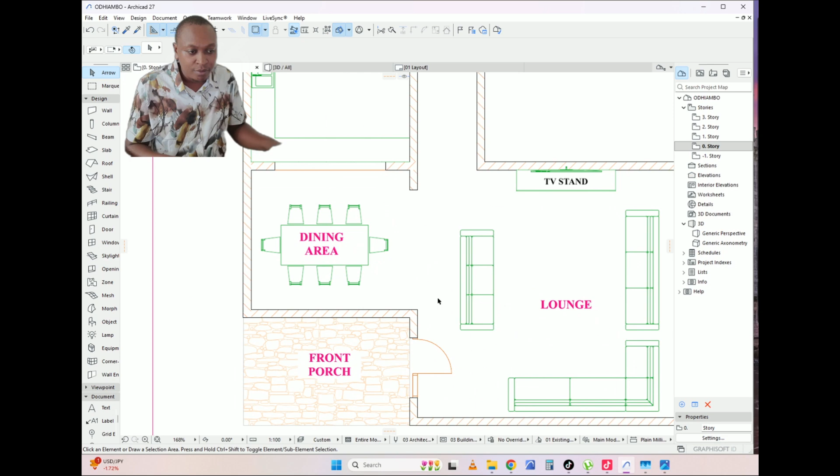So ukiingia hivi unapata lounge yako mzuri hapo, very spacious. TV stand yako iko hapo, dining iko hapa hivi, kitchen iko hapa.

Okay, now when it comes to the kitchen, kuna kitu tunaitanga the work triangle. Sawa, the relationship between your wash area, that is your cleaning area, ambao ni sink, with relation to penye unapikia na pia penye hii fridge iko.

So I want us to place these elements in a way that now maneno ya workability, hii kitchen itakuwa seamless.

So kuja hapa, so this is my cooking area. Hii naweza ipigisha corner. No, I'll need first of all, yes, I'll need this corner.

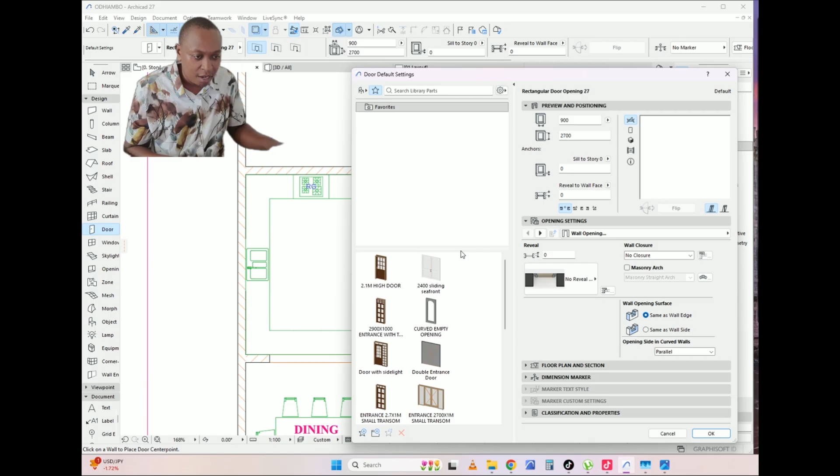So now I can introduce the door to my kitchen. Door nitakuja nichukue hii nilete hapa hivi. Hiyo ndio mlango ya kitchen yangu, okay? That is the door to my kitchen.

So nikiingia hivi napata some worktop. I can introduce some two stools hapa. Some two stools here. Where are some chairs?

Yeah. Which one is your favorite one? Style 1, 2, 3, 4. You can use any. Let me use these 3.

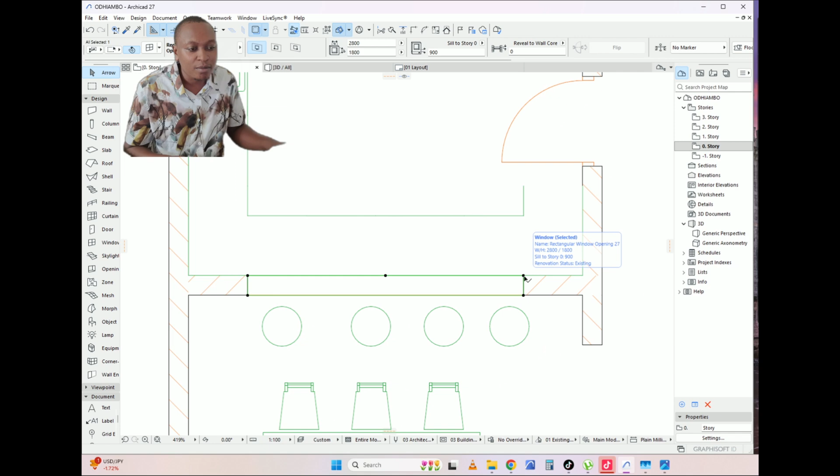So huku ni tu vitu wenyewe tunakonga kwa dining. Okay? Tunyo mnasema tunaitanga sijui breakfast place kitu kama hiyo. So I think my kitchen now is almost complete. Hii dining yangu iko chonjo hapo.

Do you need to make this bigger? Yeah, just a bit bigger. Just a bit bigger. 400. Yeah. 200. Yes.

Now my dining area. Top. This is the sink, these are the cooking area, and this is the fridge. So what I'm calling the kitchen triangle is this, okay, the relationship between these 3 elements. This is what makes your kitchen very, very practical.

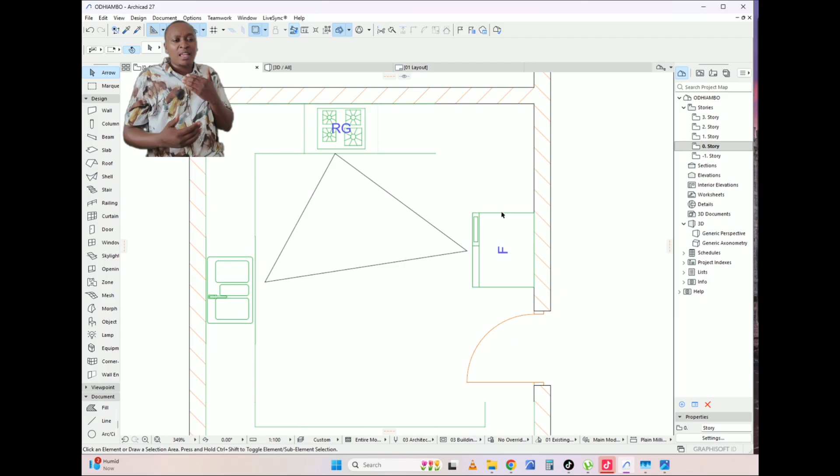Otherwise, sijui kama ushaenda pahali unapata the cooking space is too far from the washing area, na unapata pia inakuwa too far from the fridge. So hii work triangle ama kitchen triangle inakuwa very, very important.

Okay, so I need a pantry here. Pantry, size ya pantry inafaa ikuwe aje? Acha kwanza niweke mlango alafu tuchambue.

Hii pantry, size ya pantry inafaa ikuwe namna gani? Very many people get confused. We'll also need a back door. Mkumbuke hiyo, nisisahau.

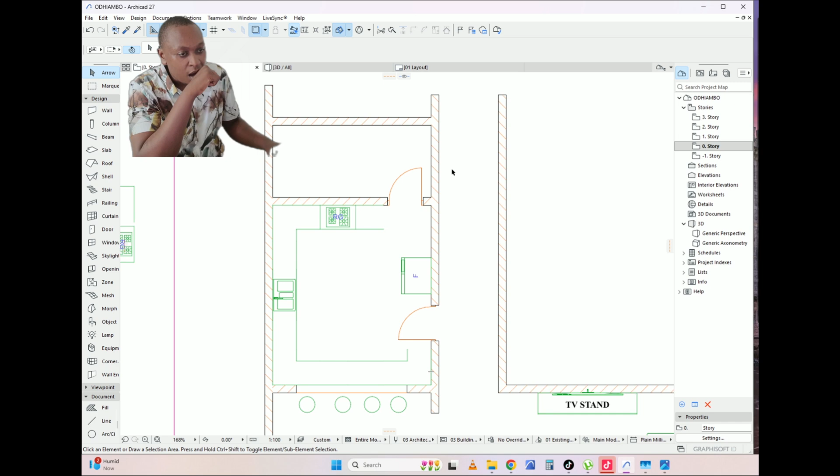Pantry, size ya pantry inafaa ikuwe aje? Pantry inafaa ikuwe design yenyewe unaweza weka what we call a cabinet ama a storage space yenye iko na depth ya 2 feet.

Okay, so hapa naweza kadirisha yangu na niweke my storage hapa. Hii ndio kitu naita storage.

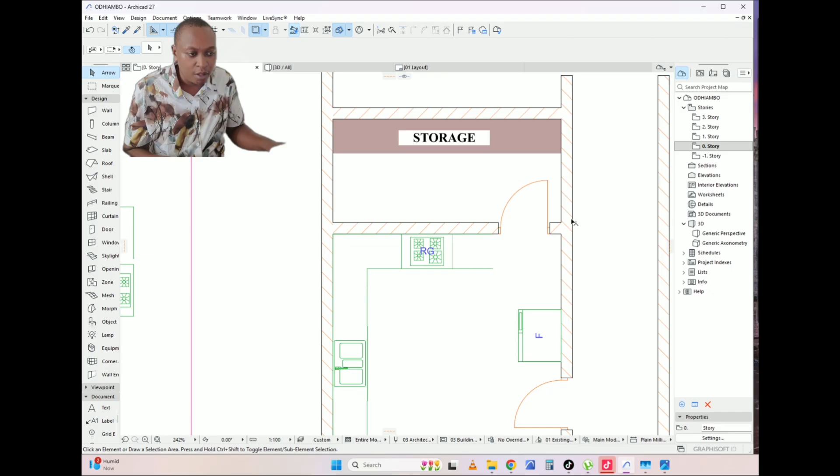Okay, but I want to introduce a back door at this position. So how do I go about it? I don't want a back door into the pantry. No. What I want, this being my kitchen.

Sijui kwa nini mwenye alikama na hii jina kitchen aliyekatia hapa. Ama inafaa kwa kitchen. I don't know. But

To make sure that I don't introduce so much circulation area into this kitchen, nataka nilete back door yangu hapa. This will be my back door.

Na hata inaweza funguka na nje, to make sure that now tutatumia space yetu ya ndani sana, so hii inaweza kuwa back door yetu.

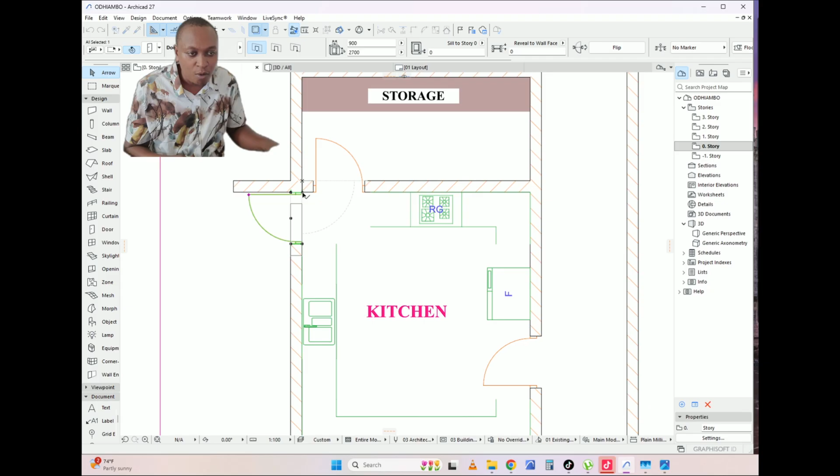Maybe hii sink sasa isonge tu kidogo. How big is this? This is 600. Songe tu kidogo, alafu nipatie dola kama 2 hivi hapo. And then I'll come now balance my

things are nini. Yeah. So this being my kitchen, so my triangle still remains, as you can see. So this is my kitchen.

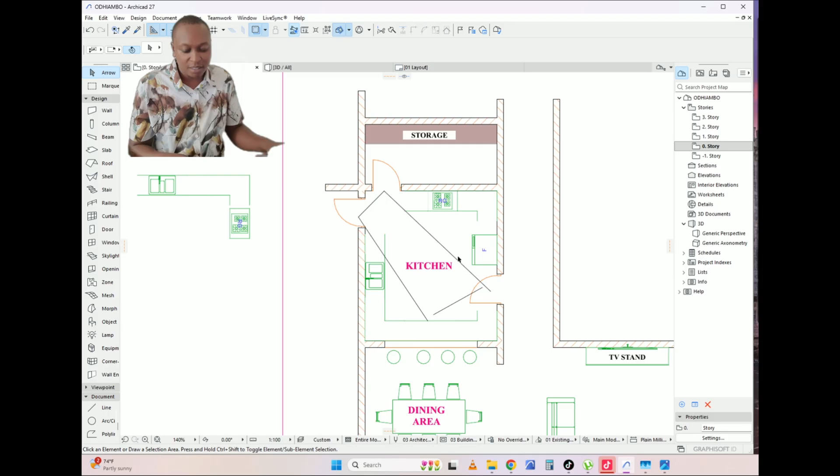So nikiwa kitchen yangu, I have my fridge here close to my cooking space. Sijui kama unaona, so the only circulation space nimeintroduce ni katikati. Na unaona inafanya nini? Ina match. Sawa? Sijui kumatch ama ni kufanya, lakini iko tu sawa.

Just a recap kwa wageni wenye wametujoin sahi. Ukiingia hapa, unakuja lounge, unaingia dining. There is a breakfast place here where we have like 4 to 6. Unaingia kitchen yako. Okay? Ukiingia kitchen, unapata fridge hapo, cooking space na nini hapo.

Then hapa kuna pantry, this is what we call a kitchen store. Pantry. Ndio tunataka pantry. So I'm done with my kitchen, and now I'm supposed to look for my common washroom. Hiyo ndio kitu next nataka tufikirie kuihusu.

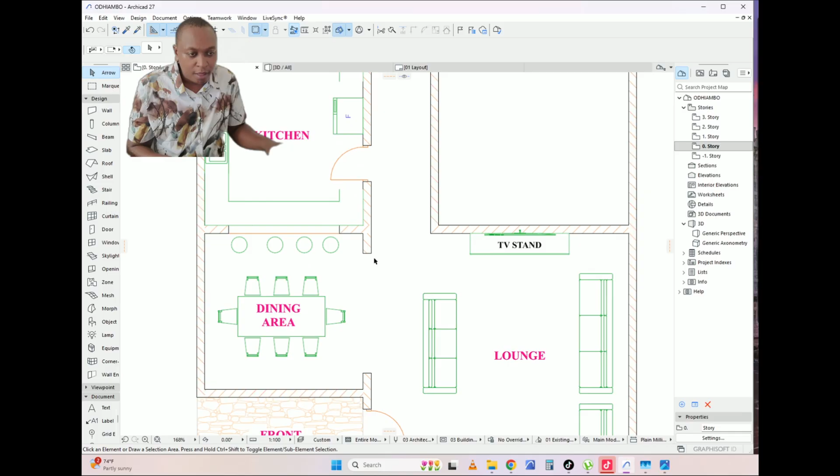Maybe tunaweza funga hii kidogo 2500. Maybe tuifungue hii side. So ukiwa lounge huwezi ona kenye inaendelea kitchen. So after that now I'll come regulate.

I'll come fix now my back porch at this point. Back porch yangu inafaa ikuwe how big? Hii ni swali moja. Back porch yangu inafaa ikuwe at least 1500, that is 1.5 meters wide.

Okay, so now nataka at this point now I'm able to determine the size of my front yard. Size ya front yard yangu inafaa ikuwe at least 7 meters. Sawa? Na juu shamba yetu ni kubwa na huku hivi nyuma, mimi nataka niweke kama 10 meters. Sawa? Kutoka hapa kuja hapa ikuwe 10 meters.

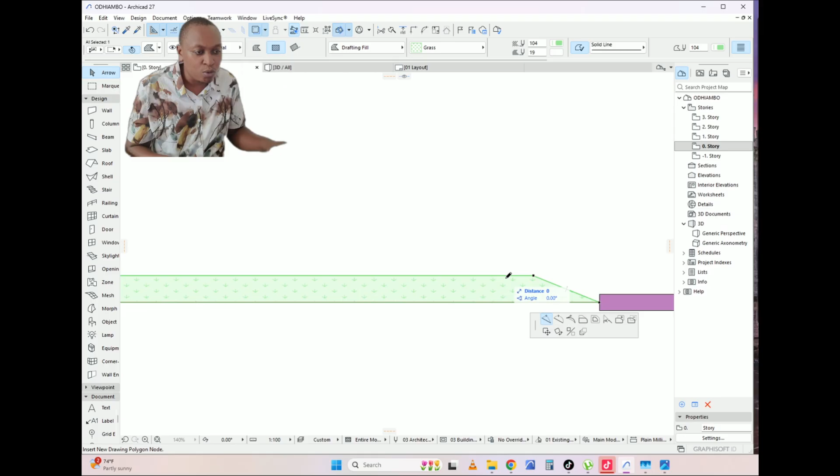Now for this green area, I want to make sure my dimensions are right. At least the green area should be about 1 meter. Then I can make this a bit curved, curved further out. If it's too far, let me bring it closer, because I want it at 1 meter. And that is my green area.

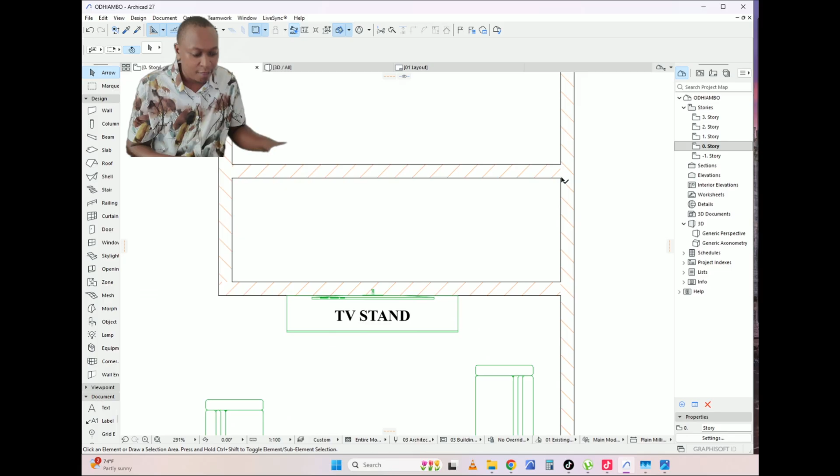So I'll bring my house towards this side by 2 meters. So it will be 2 meters. Now I'm left with 1.5 meters. I'm thinking I'll put my washroom here. This should be 1.5 meters.

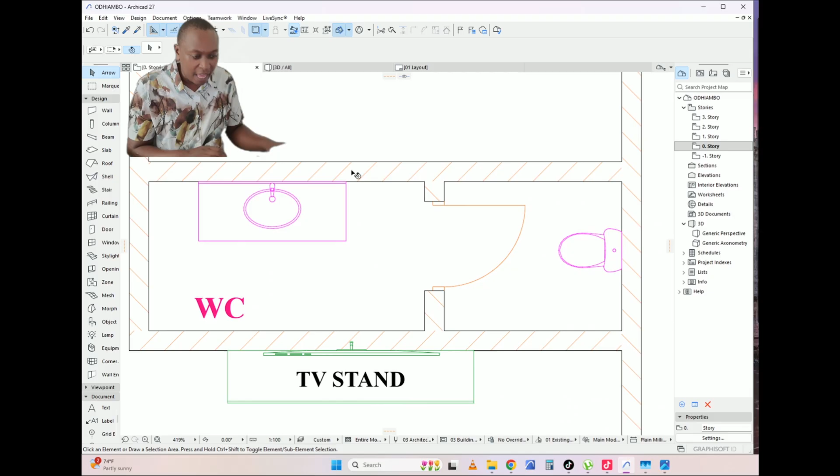So let me check the walkway—is it enough? That's 0.9 meters. Maybe what I can do is widen this a little bit, because I want this thing to be inbuilt.

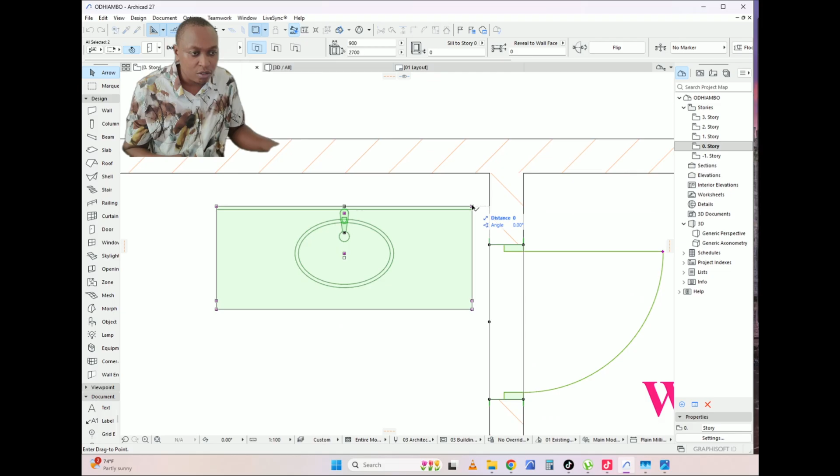Empty opening—where are you? An empty opening that is 2.7 meters tall, 900 wide. And then now I interchange the positions of my toilet door, bring it like this, so this becomes my common toilet.

So this sink, how big is it? It's 2 feet by 1.5. That leaves me some storage space here. Here we can have a cabinet that can be used to store things like tissue and some detergents. So this is storage.

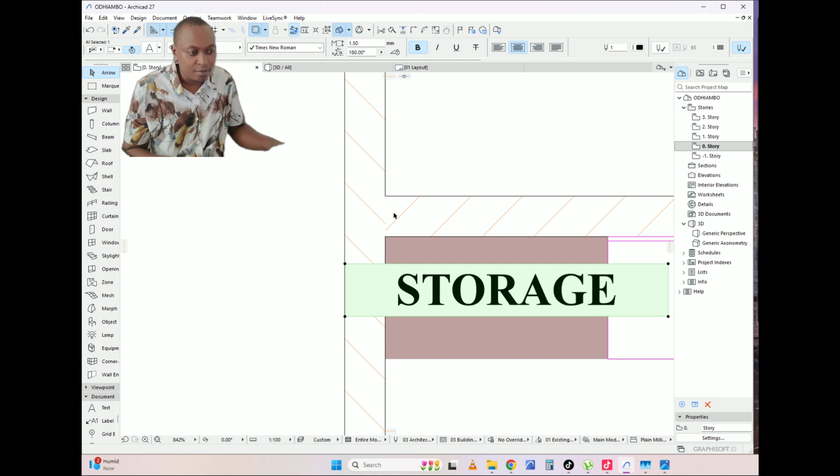I can make this a bit smaller, to 1200, and then now it matches the size. That's some storage, and that way now I have privacy—I'm not directly facing the door for this. Okay, and yeah, that's it now.

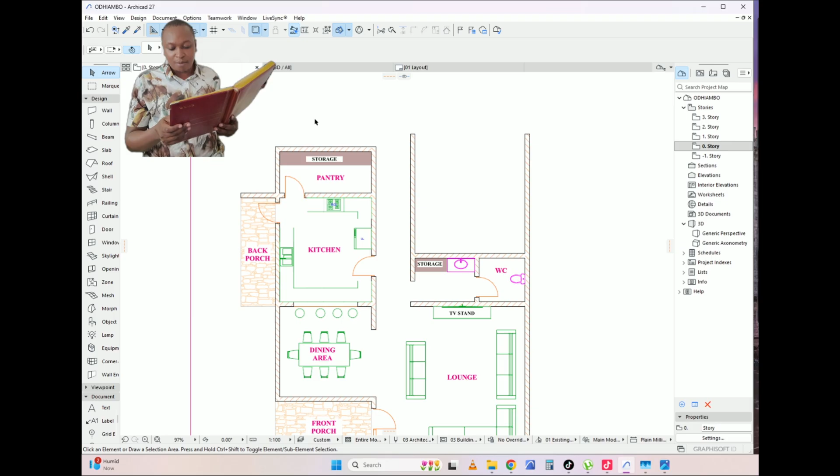We're actually missing the staircase now, staircase, guest bedroom—staircase and guest bedroom, those are things I now see we don't have, plus the laundry.

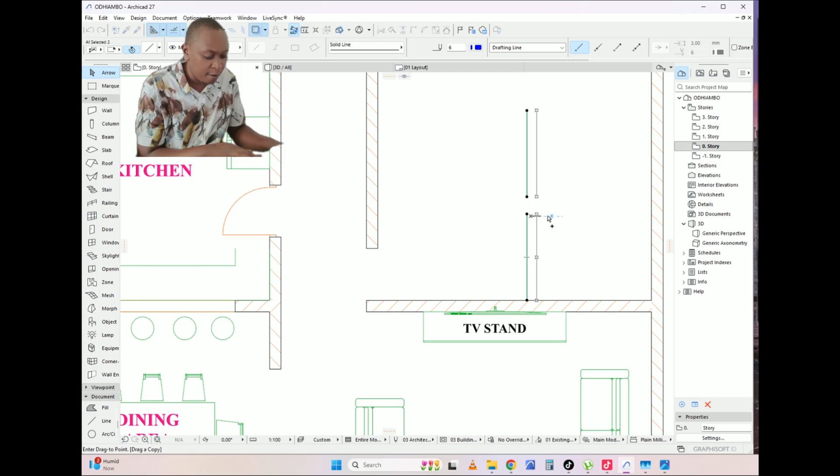My staircase is 1.5 meters wide. I've been on site for some time showing people staircase sizes, showing how you make small staircases—at times they end up too small. Those treads and risers and these lines I'm now drawing here, all this information—before you start building, you have to have the right information and the right illustration to make sure that the moment you give your builder the job of building, the builder will do the work properly.

So, 1 2 3 4 5 6 7, this should be 10, so 7 8 9 10. This 1 2 3 4 5 6 7 8 9 10. The 11th one now becomes the landing. So what is 10? I'm talking about 10 risers and 10 treads. Okay, this should be 1500.

That should be 1500, that is the size of the landing. So now it's time to finish up.

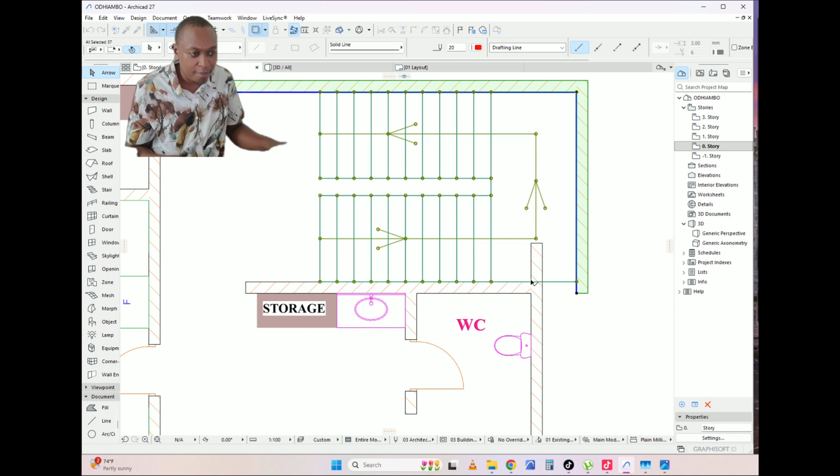What do you think? The staircase should come after the washroom. Staircase comes here, staircase comes here. Okay?

But now it's become too big - this is just the first idea. Let's see how it works out, let's put our washroom back where it was, like that. Okay, so we get this back, and instead of having a door here we make it an empty opening - 2700, let's make this an empty opening like that.

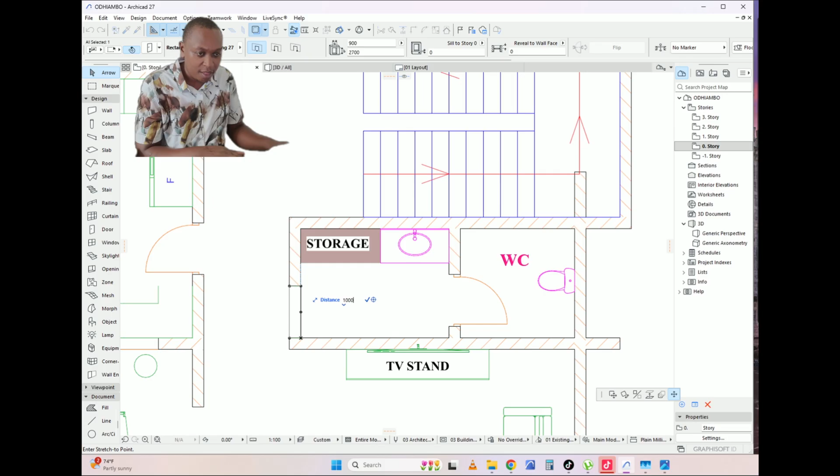1000 like that - sink and storage there. And then now we have the staircase at this position. How do you see it? Let's put the staircase here. Now as this comes in, where do we put the master bedroom or the guest bedroom?

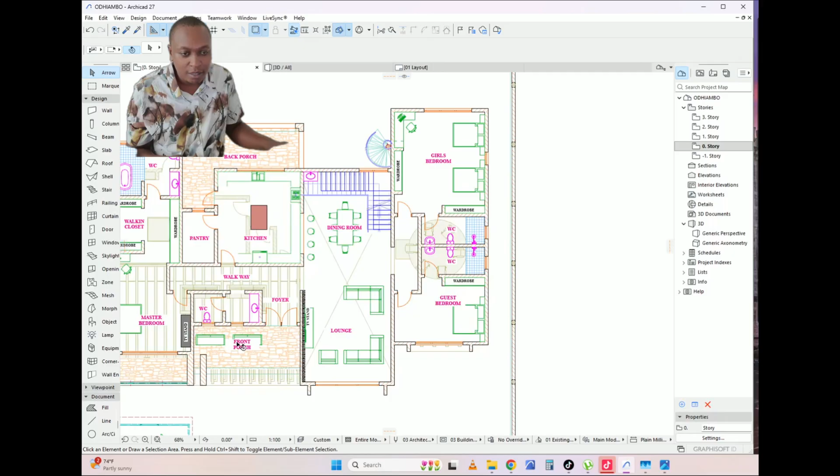So if it's a room, I've come and taken that study table and this. Okay? So for this bedroom, I want the washroom to be at this point, but I don't want to put this door there because I'm thinking, isn't it too direct?

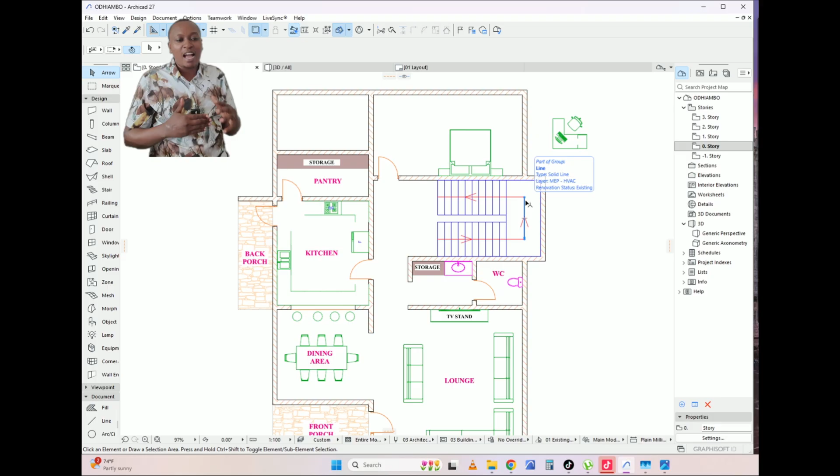So what can we do about it? Because from the look of things, this would be the best position for this though. It can happen that someone out there wants to build, is stranded, doesn't know who to start with, doesn't know who to call.

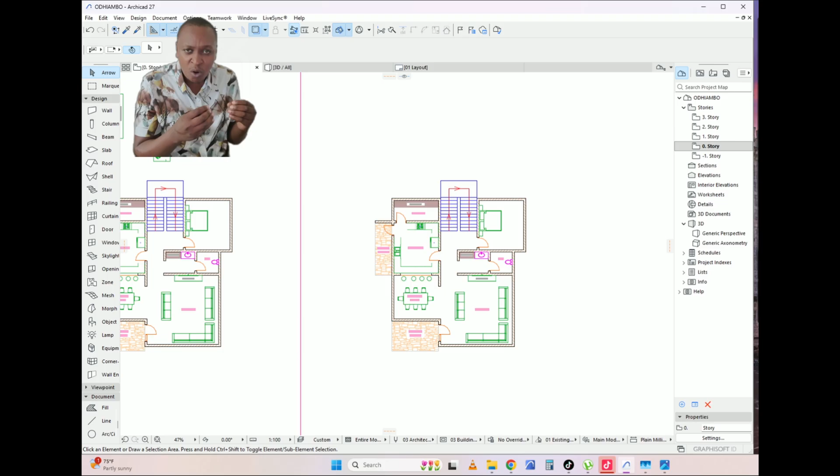These are the basic informations. Kama nantahitaji hizi ni zile basic ujanjas, maujanja ndogo ndogo wewe kama client unafaa kuwa nazo basically.

Na the reason why niliwaambia mi ni educate sana ni kwa sababu I need clients who are educated, because dealing with an educated client is way easier compared to kudeal na mtu mwenye hata hajui plan ni nini, hajui hata anataka nini. So that's why nawaambia ngoja kwanza ni-follow.

Kama uko hapa, niweke shower, na niweke bafu hapo. Niweke choo na niweke bafu hapo, lakini sasa hiyo bafu nitaiweka hiyo side. Maybe I can use some different color and some different marking.

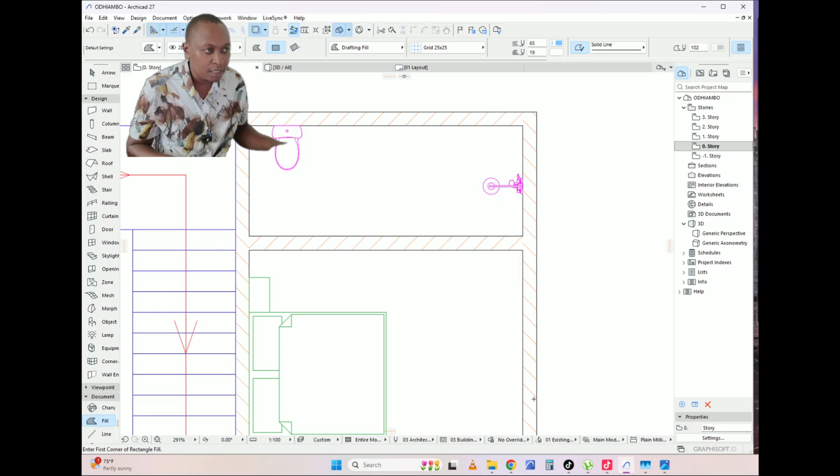Hii bafu yangu iko hivi, iko 1200. Hii ni choo, sawa? Na bafu yangu iko wapi? This is my shower cabin.

And then at the center, what do I place? Okay, sijui kama mnaelewa hiyo njaro. Wacha niwaeleweshe vizuri. Wengine wanauliza sasa, milango ziko wapi za kuingia kwa shower, sijui ziko wapi.

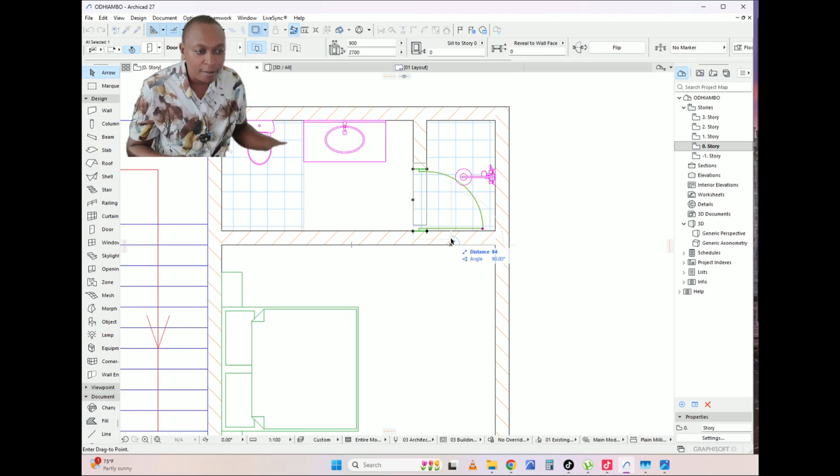Naweza amua ni kwenda sliding ama hizi milango tu za kawaida. Okay, zamani kuna sliding ama hizi milango za kawaida.

So nikitumia milango za kawaida, I'll have to make this a bit bigger and practical. Na practicality hapa ndio inakujia. Hii maneno ya ukifungua mlango, sijui inaanza kuongana na shower ama inaanza kuongana na choo.

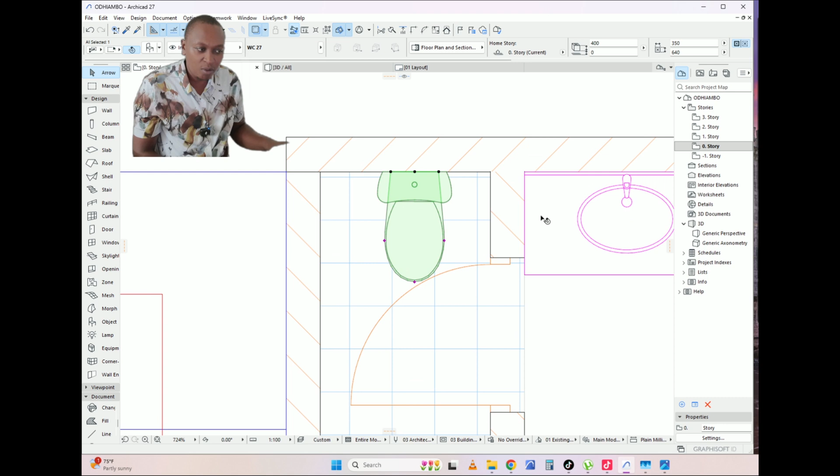Acha nitumie hii choo kama example mzuri. Nikifungua mlango yangu ya choo, sifai ati ikue sasa hata hiyo mlango siwezi ifungua yote kabisa. No, that is very wrong. Okay, so I need space.

Okay, if at all nitatumia kind of hizi milango, nitahitaji space for the toilet side, ndio choo yangu nisikuje nikagonga choo na hii mlango. Unaona, unafungua vizuri, unafanya shughuli yako hapo, unamalizia.

Okay, also hii sink sioni zina crash, so I need more space. The only disadvantage of this kind of washroom, inachukua more space, but this is one of the best layouts as a washroom, especially for the master bedroom.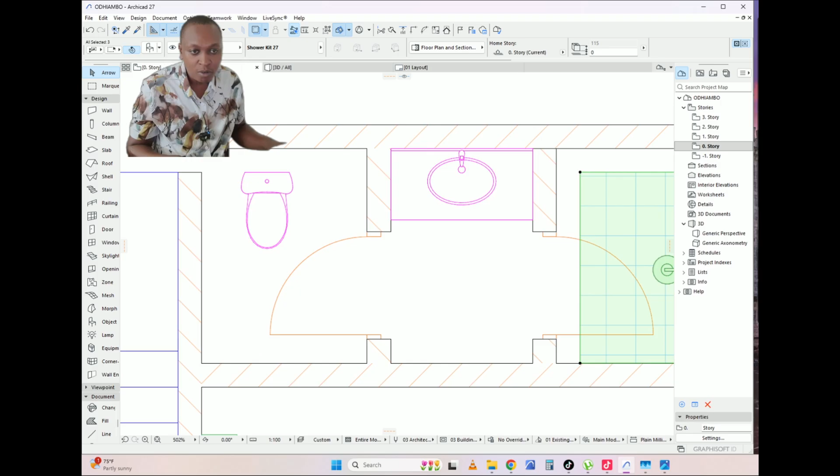So hapo, then I copy this dimension which is 1400 millimeters, niweke hapo. Sasa hii ndio shower yangu, huku ndio nitakuwa naogea. Unaona? Yeah, and now I have, yeah, like that.

So katikati niko na sink. What do you think, guys? Katikati niko na sink yangu. On the left niko na toilet. And on the right niko na nini? Niko na shower. So let's do some labeling.

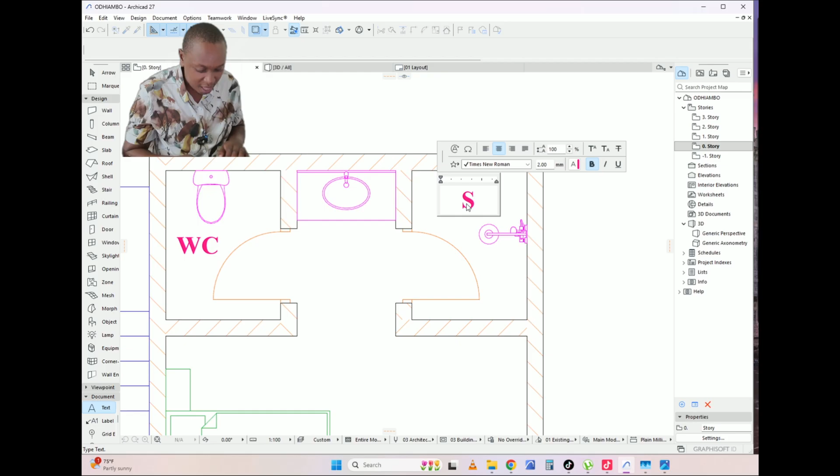This will be my toilet, naitanga WC. Na hii shower tunaitanga SHR. Hiyo ndio ile abbreviation natumianga ya shower. That is the shower, and this is the WC, that is the toilet. So what do you think about these, guys?

So I have now my bedroom. Na in fact sasa hii nitakuja nilete hii pande, because now we have enough space. For the issues to do with privacy, okay, hiyo nitaongelelea.

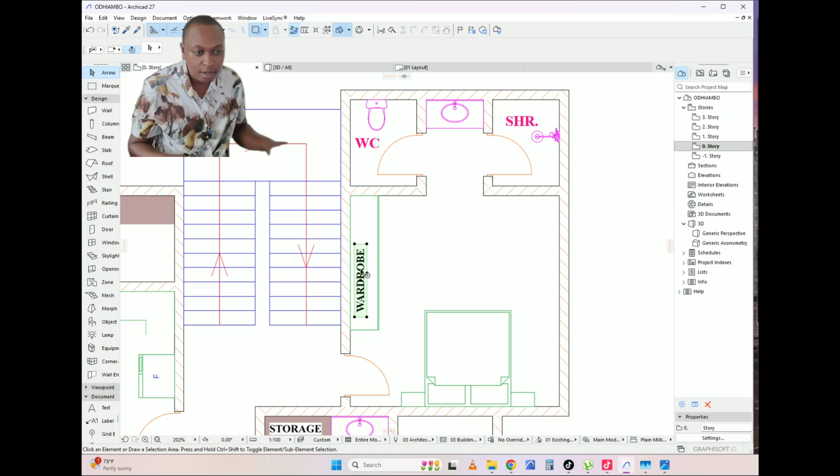Lakini nataka sasa kuwa na wardrobe yangu hapa. Unaona, niko na wardrobe hapo. Na hii tuifanye 2800, tuifanye 2800 hivyo. Okay, maybe push this bit better a little. Yeah, something like that.

Naona je maneno. Maybe sasa hii naweza iweka ikiwa corner, a corner wardrobe, if need be. A corner wardrobe, where is it? I'll get this and get a corner wardrobe.

Okay, so now I also use this space. Sasa nitateremsha hivi maybe to 2500. Yeah, something like that. Na kama ni ile meza yangu, nitakuja niisunde wapi? Kwa hii corner. Okay, yeah, something like that, kitu kama hiyo.

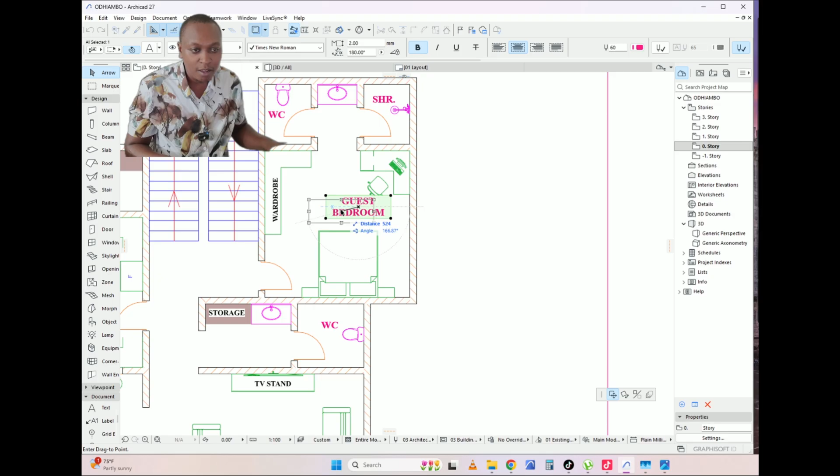And this one becomes our guest bedroom, that's our guest bedroom with its washroom. Hapo hivyo. So this could be brought to this end. Sasa hii wall ikuwe common hivyo, na hii ingine zipatanie wapi? Hapo. Okay.

Maneno kama hii sasa, this axis, yeah, same line. So guys, what do you think about now my arrangement? So far this is what I've come up with.

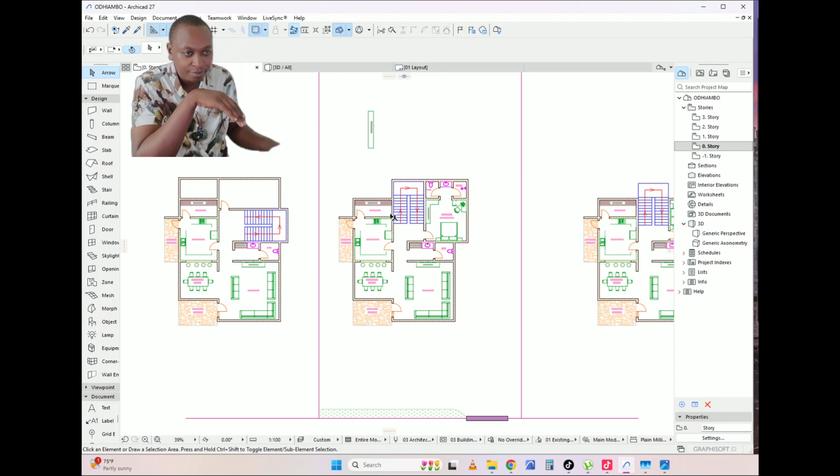And this was my first idea. Sawa, ilikuwa idea yangu ya kwanza. So nilikuwa nimesema nitaonyesha idea nyingine hapa. So the other idea hapa ilikuwa ni kuwa na different arrangement, actually the only kitu nilikuwa nifanye

different ni kurudisha tu hii kitanda hapa na kuweka wardrobe hapa, hapo, hapo. Okay, hiyo ndio kitu nilikuwa nifanye.

So I want you to tell me hapo hivyo sasa. Now let's discuss between this A and B. This is my A, let me do for you here. This is my A and B. Which one looks better?

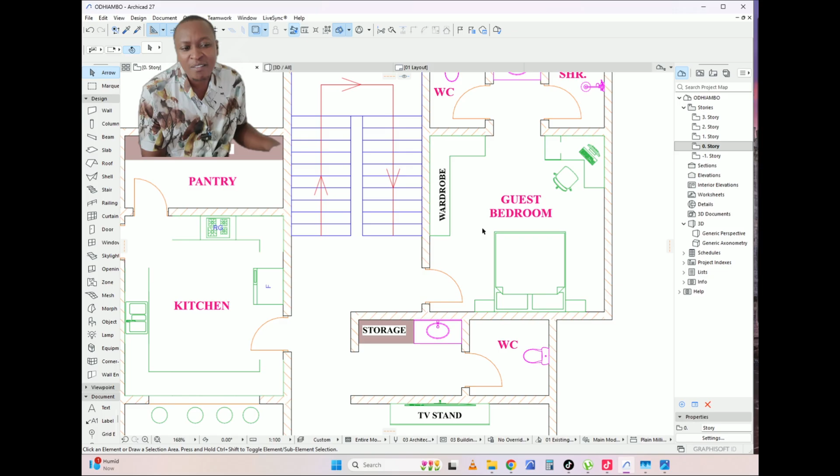So the only difference between these two layouts ni the position of this bed, yeah, guest bedroom. So kati hizi layouts mbili ni gani mnaona iko sawa? Okay, wengine wenu mtaanza kusema sijui ukiingia hivi unaona bed, but ukiangalia hii place, bedroom iko in a very very private place. Si ati ukifungua mlango utaonekana na mtu akiwa dining ama ako kitchen.

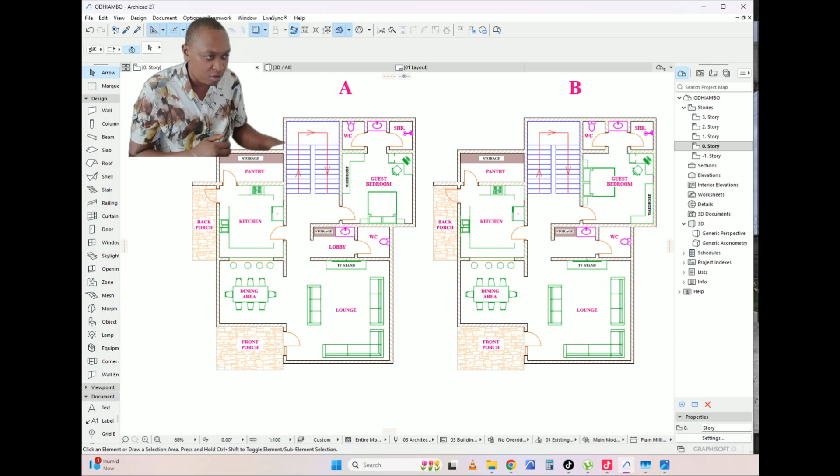So my question is between A and B, what am I comparing here? What elements am I looking at? Everything else is the same apart from these two guest bedrooms.

For our first guest bedroom, that is case A, when you enter you get the bed here, the wardrobe here, some study area here, and then you get a washroom. On the left we have the dry area, that is the toilet, and here we have the wet area, that is the shower.

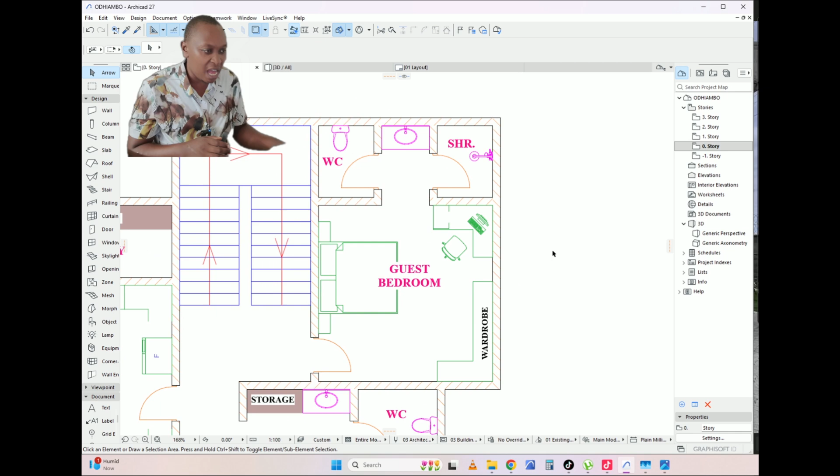I think now you need to tell me guys, between these two layouts, which one do you prefer? For me, my favorite one is this one, A. I'll tell you why. I want to see who will choose B and who will choose A.

For this case, the reason why I've chosen A is because when I come to place my windows - let's get into the topic of windows now - where will I put my window? At that position. How big is my window?

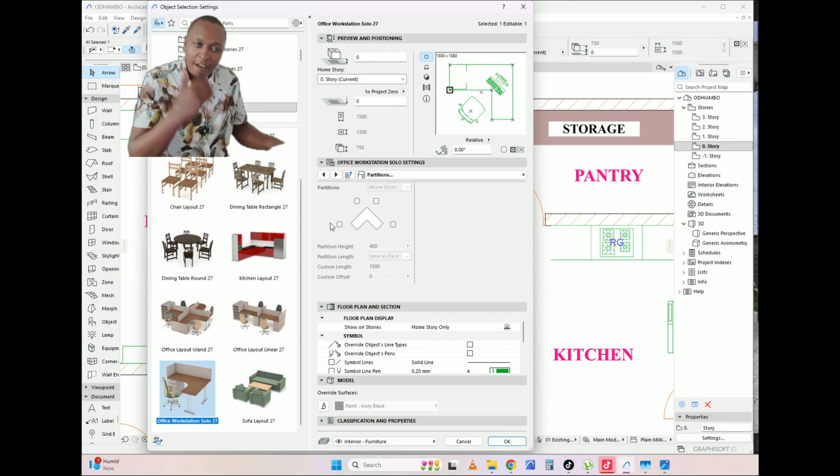It can be as big as 2.5 meters wide. Those of you who have been watching my videos here on TikTok, YouTube, Facebook, I've talked a lot about windows while on site.

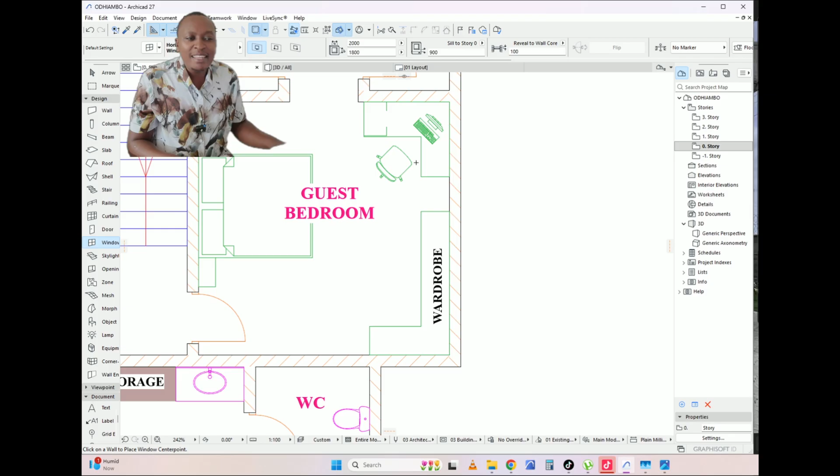So that disqualifies this side. We completely disqualify this one. And we now go with A.

So I want us now to embark right away to install our windows. The layout for the ground floor, that we have done.

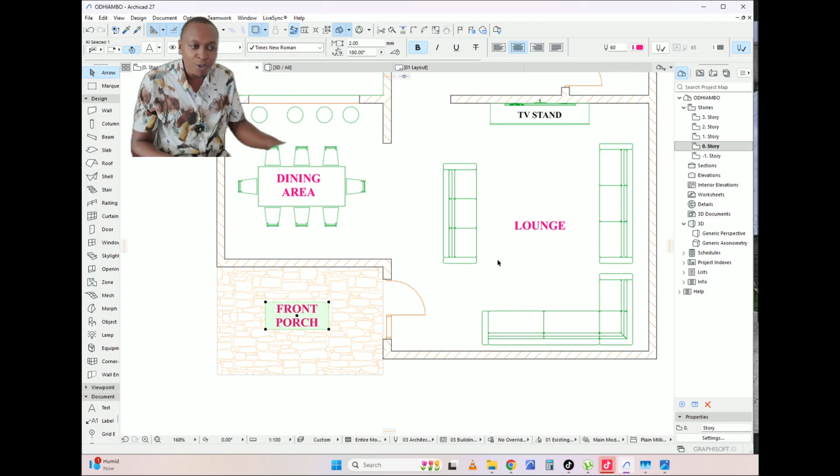Just a recap for those of you who have just joined - this is the front porch, whereby when you enter you get a very very spacious lounge, and to the left we have the dining that is now open to the kitchen. So the kitchen is only open to the dining. At this point we have our common washroom that has a lobby.

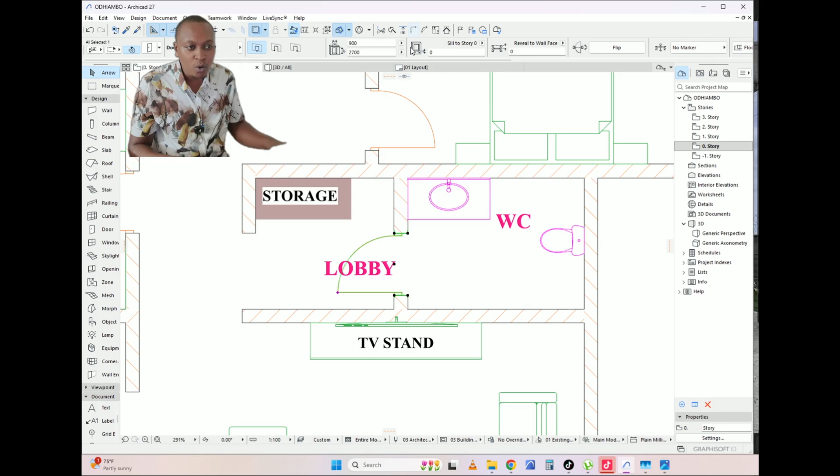Here at the lobby we have a sink and some storage. The advantage of having this sink here is so that it can be used by someone who isn't going into the toilet itself. Otherwise I would have had my sink inside there, which would be very funny - imagine telling someone there's a sink inside the toilet. No. So the best position for the sink is outside here so that it becomes multi-functional, multi-purpose.

Towards this side, here we have our staircase, and just next to it we have a guest bedroom that is en suite. For the en suite guest bedroom, this is the position of the bed.

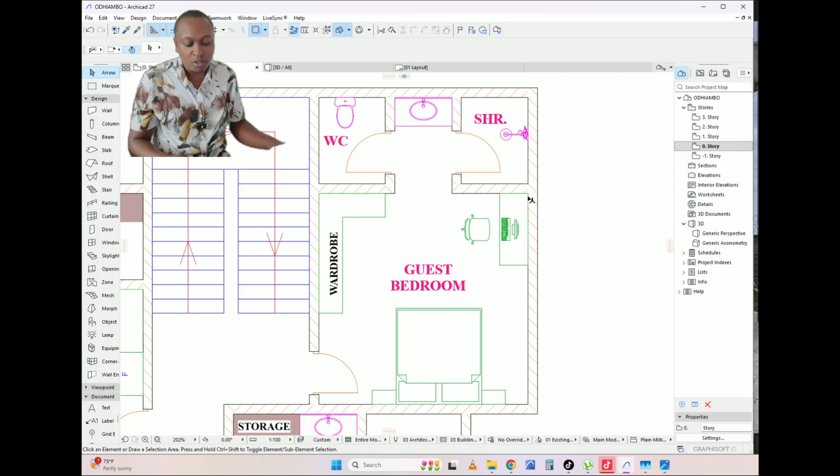This is the position of the wardrobe, and this is the position of the study area, which can also be changed however you want. For the washroom, I've separated the dry area from the wet area. The toilet is on the left side with its own door, and on the right side we have the shower, so there is no water spilling from one side to the other. If you just want to use the sink without entering the shower or toilet, you can still do so.

Okay, so let's start putting in our windows. First I'll start with the lounge window. The lounge window should be big, as big as possible. Mine will be 3.5 meters wide, which could even be 4 meters. Even 4 meters fits very well here.

The advantage of having big windows is that we get ample lighting and ample ventilation. You don't want a dining area that lacks ample ventilation and lighting.

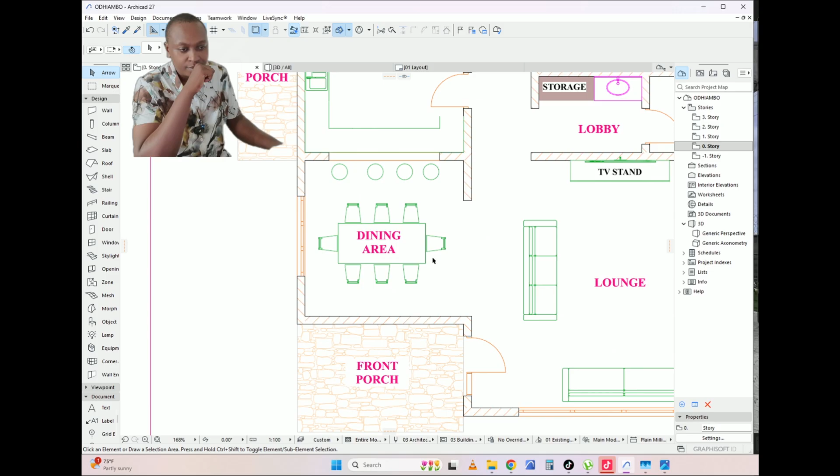So for my window here, I'll have one that is 2 meters wide, and on this other side I'll have another one that is also 2 meters wide. So we'll have 2 windows for the dining area.

That one is 2 meters wide. Now coming to the kitchen, we have only one window but as big as possible - 2 meters wide. And if you look, I've positioned where we have the sink.

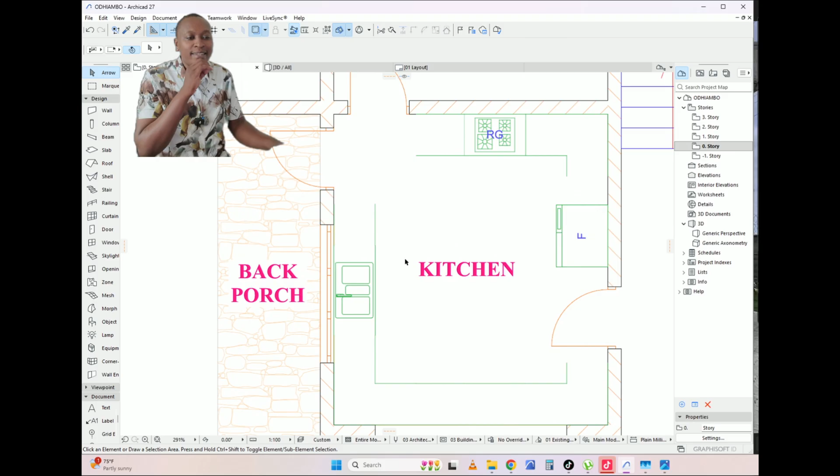Remember, as we were designing this kitchen, we talked about the work triangle - the relationship between the sink, the cooking area, and the fridge is very important. In this illustration, I've made sure the sink is as close as possible to the cooking space and the fridge. The sink is placed by the window, and the cooking space is positioned with proximity to the wash area and the fridge. This is what we call the work or kitchen triangle.

This kitchen has 2 doors, one opening to the pantry, and the pantry is big enough. Apart from having storage, we also make sure the pantry window is big enough so we don't end up with a stuffy pantry. A stuffy pantry would be very unprofessional.

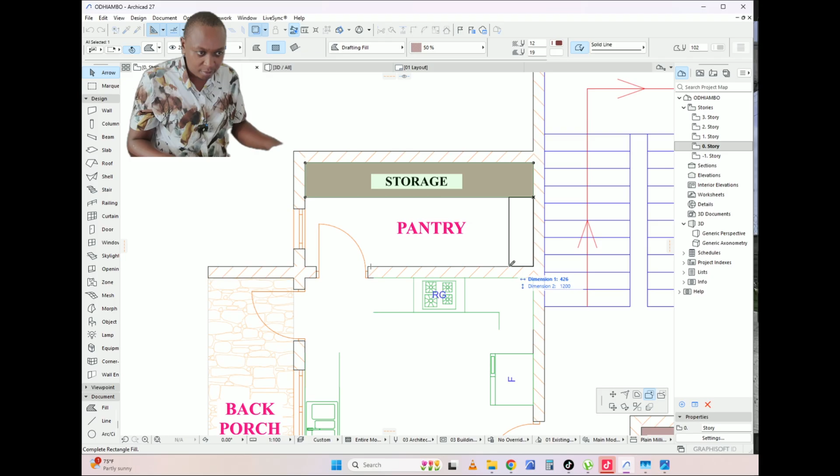That is where we have our pantry with storage; in fact storage can extend all the way into the corner. For some of you, when you get your pantry drawn, yes it's a pantry, but it has too much circulation space and too much waste space, so you can't even fit an L-shaped storage space like this one. But for our case here at Mathmark Builders, led by engineer Ivan, we plan better and we build better.

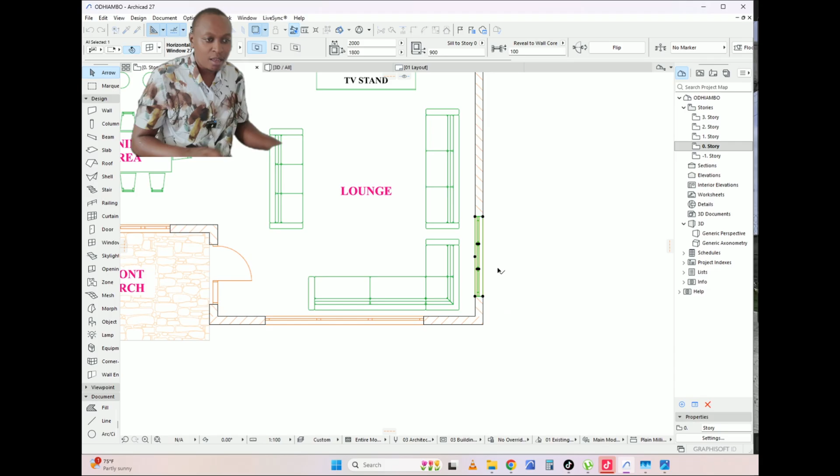So that's our pantry, and now on the lounge side I also want to put another window. For our case now, instead of having one that is 4 meters wide like the other, I'll have 2 windows of 2 meters each just to break the monotony. So here we have one window that's 2 meters and another that's 2 meters.

So when it comes to lighting and ventilation, are we together? We are completely together. When we go to our washroom, we need a washroom that is well lit and well ventilated.

For that reason, I'm going to have a washroom window that is 1.5 meters above ground level. The height of the window itself is 1.2 meters and it will be 3 feet wide, that is 0.9 meters wide. Here is where I'll place it, so now I make sure my washroom isn't dark.

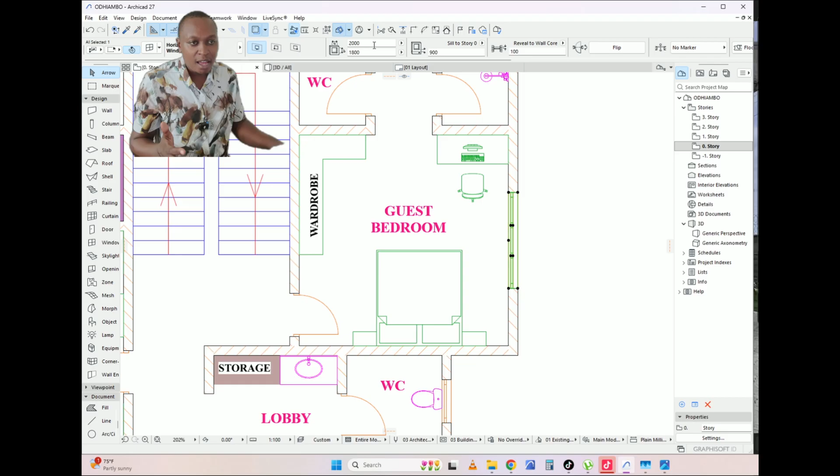And when it comes to the guest bedroom, I'll have a window at this position, and this window can be as big as not 2 meters but 2.5 meters. Remember, the matter of windows is very, very important.

So for my showers here, I'll have this window that is 1.5 meters above ground level. The window itself is 1.2 meters and it's 3 feet wide, that is 900 millimeters.

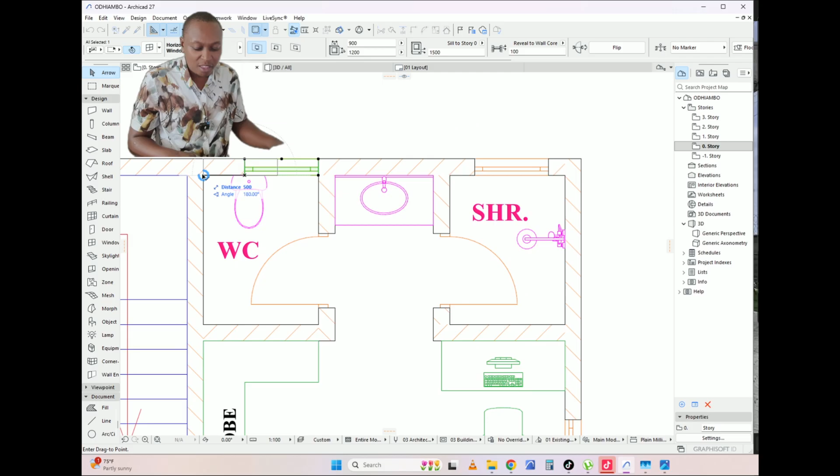That's why it's very important to involve professionals when designing and building your property. It could be a rental property, a home for your family, or a house you want to build and sell later.

So there is one more thing we are yet to work on, and this is called the laundry area. I haven't seen anyone ask why there is a laundry area here.

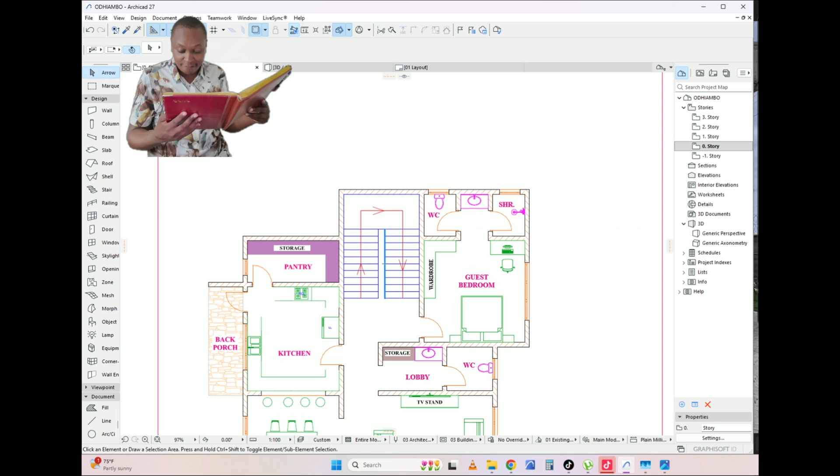The laundry is very very important. So kulingana na notes zetu, client alituambia the laundry should be accessible from the back porch, and it should be big enough to have a place for ironing, a place for the laundry machine, and also a place for cabinets, that is storage to store detergents na maneno ya sabuni. Hiyo ndo sasa tunataka tushughulikie sasa.

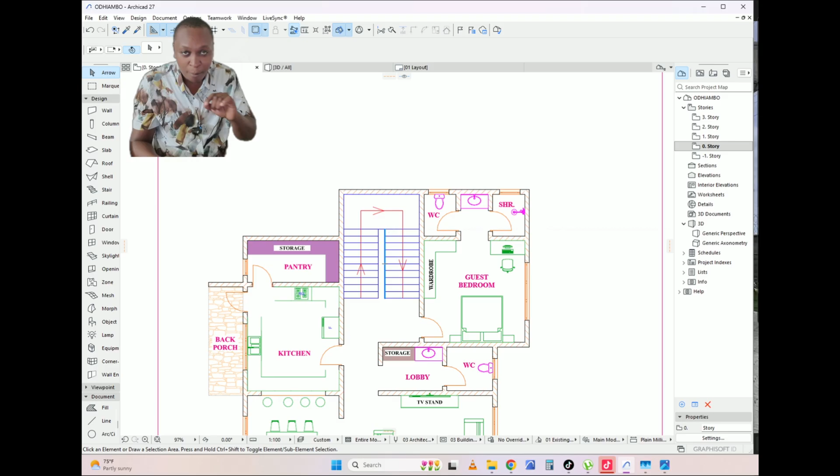So that issue ya mimi kusomea building construction in school, that is high school, ilinipatia a very big advantage compared to the rest of my colleagues, because mimi nikitoka form 4 mimi niko najua trusses, niko najua maneno ya drawings, niko najua maneno ya elevations, sections, maneno ya septic tanks. In fact, my practical exam ya form 4 ilikuwa kujenga urino.

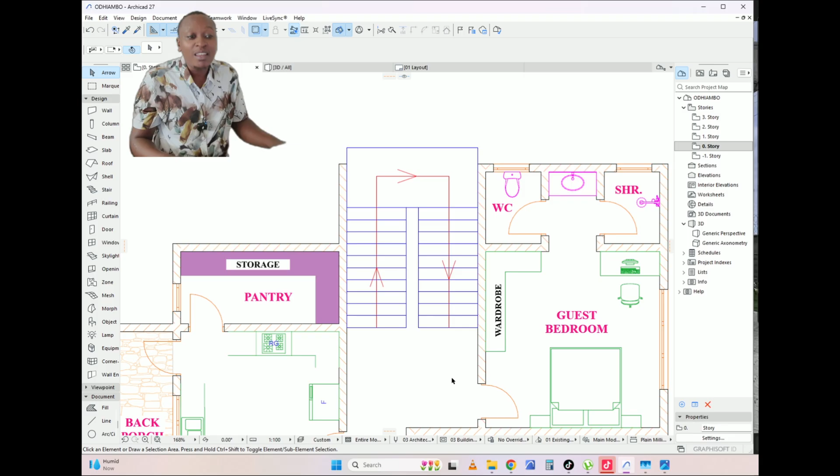Sijui kama watu wenye wametoka Kenyaga High School, sijui kama kuna mtu yote hapa ametoka Kenyaga High School na ako hapa kwa comment section, atuambie kama yeye alifanya BC. Unajua watu walikuwa wanakimbilia makompyuta, unakimbilia business, this watu wa art. Unajua kuna zile makosa zenye zilikuwa na jina shule. But for my case, nyinyi wenye mlikataa building construction Kenyaga High School, sasa mkuje ni wajengee.

So, me being exposed to knowledge regarding buildings na drawings iliniweka kipaumbele. Sijui kama nitasema kipaumbele ama sijui iliniweka nini. Iliniweka at an upper hand, because now I have a lot of knowledge when it comes to architecture.

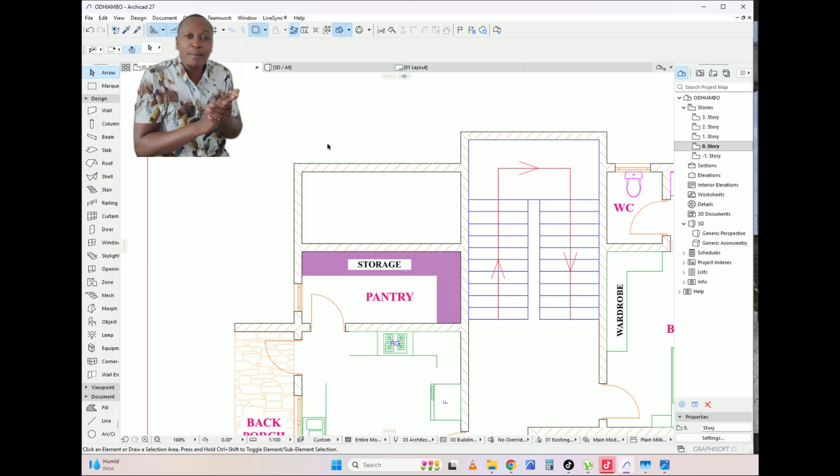Watu wengine wakistruggle kusoma plan, sijui kufanya nini. In fact vile nilienda campus, niliona sasa because now nimeperform vizuri sana nina nifanye structural engineering, because in high school mimi sikujua maneno ya structural, maneno ya machuma, maneno ya nini, you know, maneno ya foundation ya beam. So in campus I went to do structural engineering. Sasa hapo ndio engineering ilikuja.

But from form 1 mimi nilikuwa napenda architecture. Acha nikwambie kama kuna kitu nilikuwa napenda ni architecture. And from my videos nafikiri mnaonanga hivyo, I'm very passionate about architecture.

And since this construction industry imekuwa na utapeli mingi sana, I saw a niche whereby now instead of me taking advantage of clients who don't know anything about construction, nawaeducate, okay? Because I realized the reason why people are losing a lot of money in this construction industry is because one, hawana knowledge. This knowledge is very important because inakupatia wisdom na information ya kukuwezesha wewe kama client ku make a wise decision.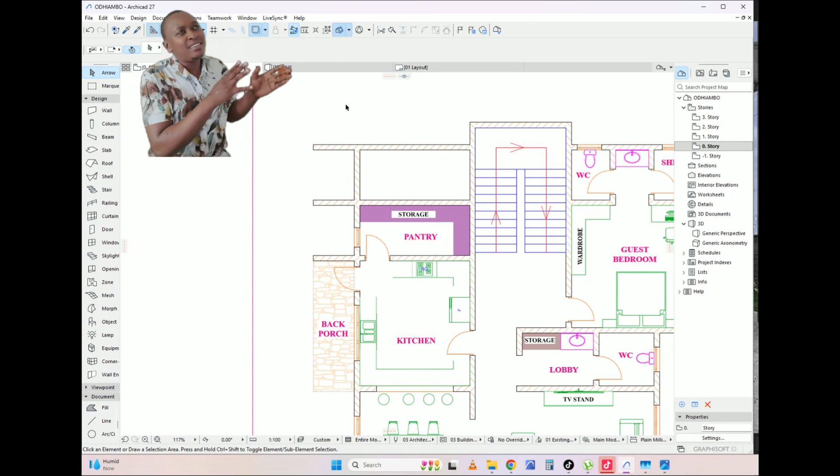But hata si ati nilikuwa nataka maneno ya kuwa educate ndio mko na hapa hand ya ku make decision, hapana. Ni realize if I educate my client, it is very easy to do business with a client who knows, with a client who is educated about building kidogo tu. Si ati uende ujue sijui maneno mingi sana, but that basic knowledge you need it. And I also need you to know that basic knowledge, so that now it becomes easy for me. Nikikwambia maneno ya structural drawing, wewe unaelewa structural drawing ni nini?

Yeah? I'm very happy because wengine wenu wamekuwa wakini follow na watch my videos, na kuna wenye sasa wako hapa hata kwa hii live. Mtu ameniwatch like for one whole year, which is very very. Hata kama una dosa inawaambianga hebu nipigie nikuje site to discuss your vision, ni hata upate kitu tunaitanga prayer item. A plan is a prayer item. Sijui kama mnanielewa. A plan is a prayer item.